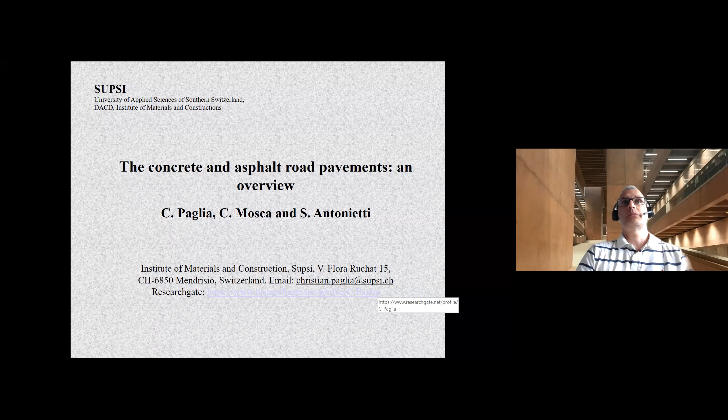Today I would like to talk a little bit about two main systems of construction of road pavements, giving you an overview of some issues, especially related to the durability of these two kinds of material used for transportation roadways. I will go through a brief introduction, talking about concrete roads and comparing them to asphalt roads, focus a little on the durability issue that arises in these two systems, and then go through the conclusions.

As you all know, there were times where most of the main building materials and also road materials consisted of stone. Here is an example of Naples, in Pompeii, where very big, large stones were used to build up the street. Today, the streets are actually still made of stone, smaller stone, aggregate stone, mixed with several binders.

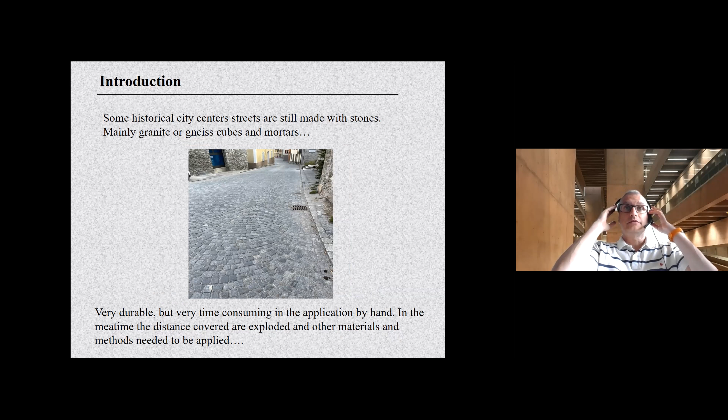Some mineral binder and more organic binder for asphalt road. Today, we also use a little bigger stone for some streets, especially in cities and small village centers, using cube stone linked together with mortar. Most of the stone used is locally sourced around the region of the Alps - mainly granitoids, gneiss, and quartzitic rocks, and in other places other types of rocks.

This type of street is actually very durable, but very time consuming, because sometimes every cube needs to be put by hand, so the application takes a lot of time. In the meantime, distances have exploded, so other materials and techniques are used to cover the roadways.

If you look at the literature research, you can see that generally it's stated that concrete road exhibits superior durability, around 25 years and sometimes longer, as compared to asphalt road, thought to last at least 15-20 years before a first restoration, at least of the first surface layer, is done.

These differences actually depend on material properties, but also on the service conditions of the roadways - the load conditions, the frequency of the load, the material used, and also environmental issues and the atmospheric exposure to which the roads are exposed.

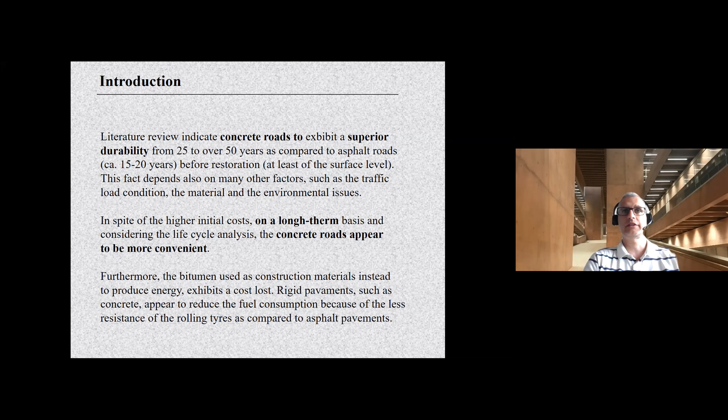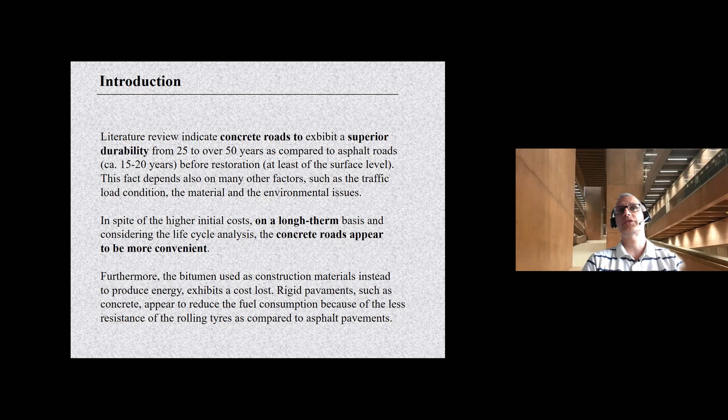In general, we can say that rigid pavements, such as concrete and cementitious material in general, appear to reduce fuel consumption because of less resistance of the tire when rolling, as compared to asphalt pavement. This is also due to rigidity, which makes a difference between these two types of material. The load distribution on a rigid pavement, like concrete, is more widespread on the surface, and locally the stresses are less intense compared to flexible asphalt road pavements.

In addition, there's the thermal impact - the asphalt material is black, and the thermal impact, heat, and light reflection may also be accounted for with this material.

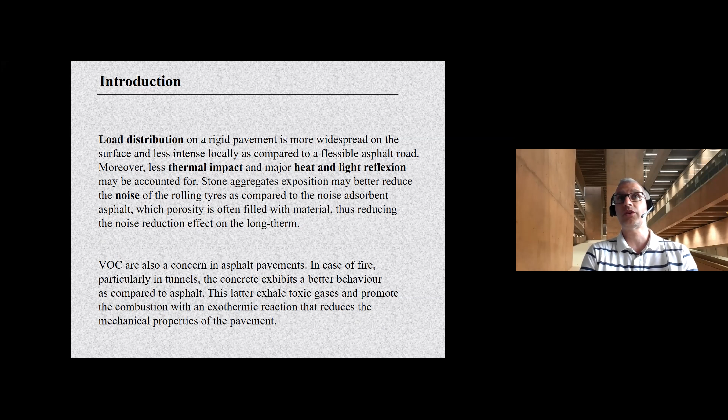Stone aggregate exposure may better reduce the noise of rolling tires compared to newer noise-absorbing asphalt, whose porosity, on a long-term basis, gets filled with material, closing these pores and reducing the effect of noise mitigation over time.

Volatile organic compounds are also a concern in asphalt, for instance in case of fire, particularly in tunnels, where sometimes a special mixture is used. When the fire ignites, these volatile compounds flow into the air, but this also happens during natural and conventional atmospheric exposure over time.

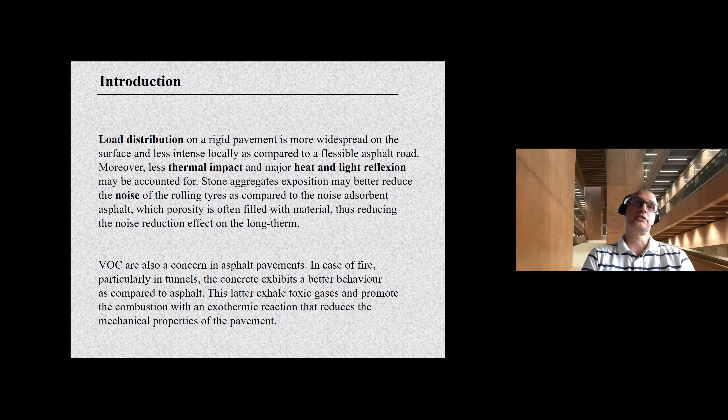In this fire resistance concern, concrete exhibits better behavior because it exhales less toxic gases and doesn't promote combustion with exothermic reaction that reduces the mechanical properties of asphalt pavements.

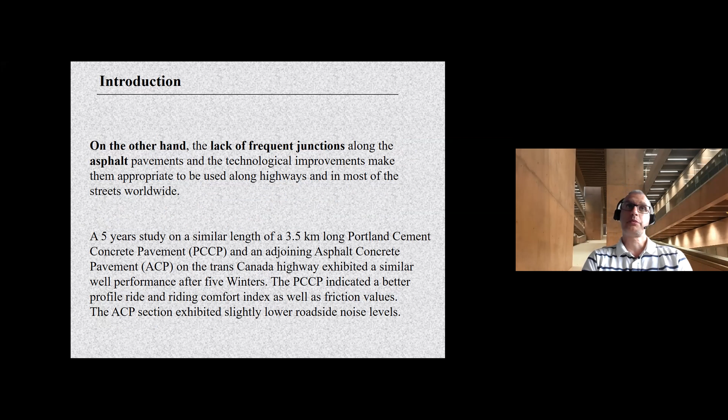On the other hand, asphalt pavements don't need junctions along the surface, and technological improvements made in recent decades have made them appropriate for use on highways, particularly where cars exhibit higher speeds, and in most streets worldwide.

We compared a study done on similar conditions - a 3.5 kilometer long Portland cement concrete pavement and asphalt concrete pavement on the Trans-Canada Highway, which exhibited good performance in both cases after 5 winters. The concrete indicated a slightly better profile ride and riding comfort index, as well as friction values, while the asphalt concrete pavement section exhibited a slightly lower noise level.

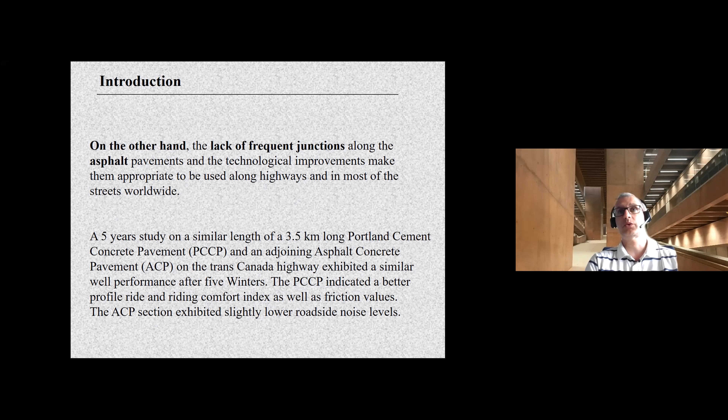Another advantage that can be seen in asphalt is that it can be placed quite quickly compared to concrete, and it also provides better safety of vehicles against snow and skidding compared to cementitious materials.

Portland cement concrete pavement, or concrete with supplementary cementitious material nowadays because of sustainability, has higher initial costs regardless of the cost index value, but Portland cement concrete pavements exhibit significantly lower maintenance and rehabilitation costs than hot mix asphalt along the roadways.

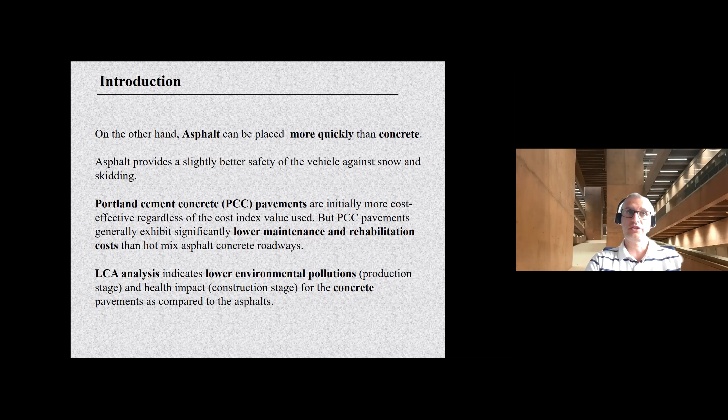Also, life cycle analysis indicates lower environmental pollution at the production stage and lower health impact at the construction stage for concrete pavement compared to bituminous materials.

We looked at some cases and saw substitution of concrete slabs on a street about 400 meters above sea level, where they used concrete with strength class C30, 30 megapascal, with a high exposition class resistant to carbonation, chloride diffusion, and freeze resistance—so generally high durability against corrosion types induced by CO2, chlorides, and freezing. We had a maximum aggregate diameter of 32 millimeters, controlled chloride content, and good workability index.

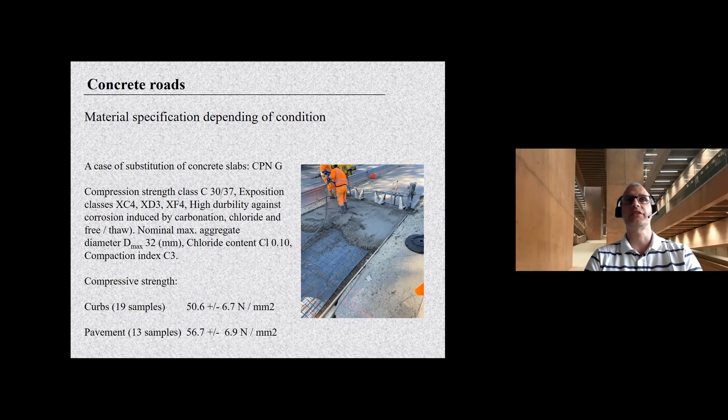We measured compressive strengths on the curbs and pavement, and you can see the mechanical properties are well above 50 megapascal, which is actually very high resistance for this type of concrete.

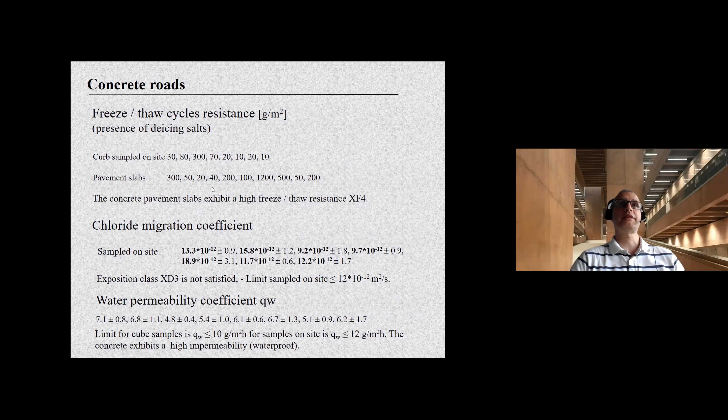Also, regarding resistance to freeze and thaw, respecting exposition class XF4, the pavement slabs and curbs sampled on site exhibited quite good resistance to freeze-thaw attack.

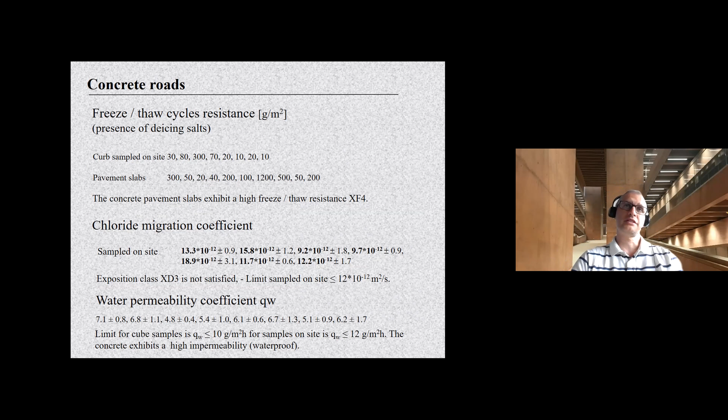Concerning the chloride migration coefficient, some values were above 12 times 10 to the minus 12 square meters per second—values ranging between 13 and 15, with some reaching 18. The exposition class XD3, which is the maximum class for cementitious material resisting chloride penetration, is not always respected.

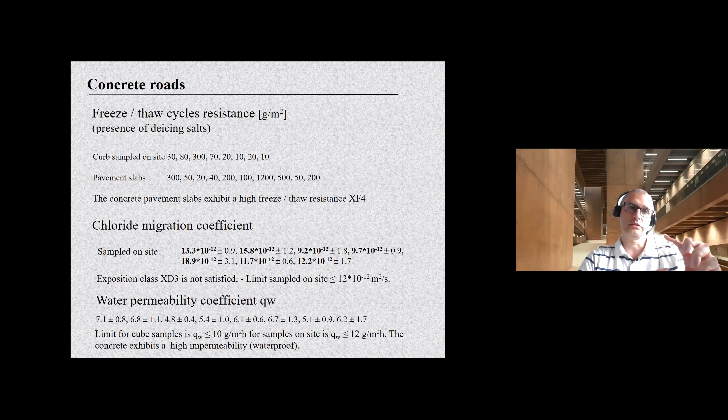Although this is sometimes not a problem if the steel rebars or steel nets are embedded deep enough in the concrete, and the concrete cover over the steel is thick enough—at least 5 centimeters—and the concrete is high quality.

If we look at the water permeability coefficient, the measurements we carried out show values pretty much below 10 to 12 grams per square meter per hour, indicating that the concrete exhibits high waterproofing quality.

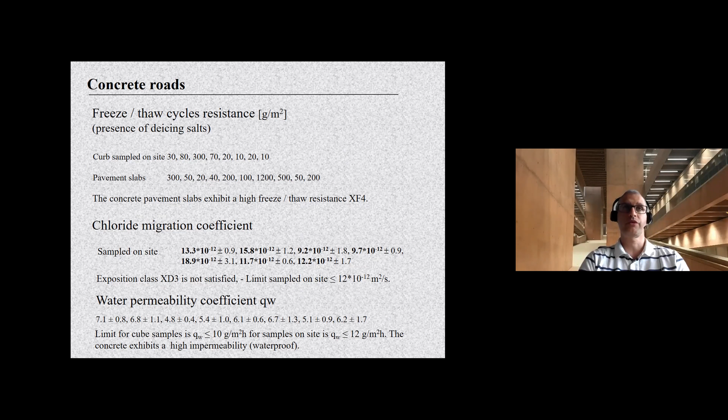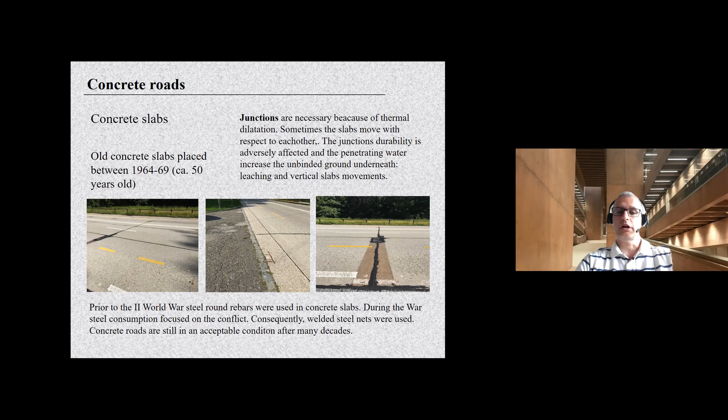Sometimes the junctions are adversely affected by the atmosphere and water, causing cracks that need to be repaired with bituminous material, as seen in the right picture. Water also infiltrates downward into the unbound material, causing leaching of fine material, which leads to vertical movement of the underlying pavement base. The concrete slabs then move vertically relative to each other, causing movement or noise when cars pass over the junction—a problem that needs to be taken into account.

From the concrete road you can also sometimes see water leaching out stone aggregate, as in the upper left picture. The exposed aggregate increases roughness over time due to better tire adhesion being maintained. In the lower left picture, tire mark residues indicate that roughness is partially maintained.

In the upper right picture, you can see surface treatment or finishing of the concrete slabs—this is a ramp or slope going down to a parking garage, showing riffling and striation of the surface to maintain necessary roughness. This surface preparation method is sometimes also used for heavily trafficked streets. In the lower right picture, you can see the texture of the street border, where the aggregate is exposed and more visible.

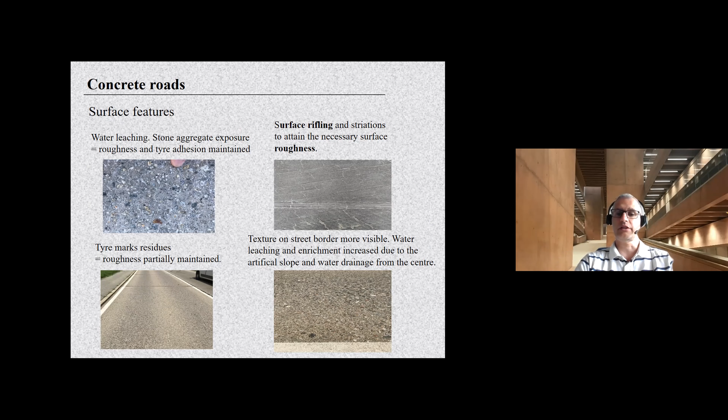This is actually due to water leaching and enrichment that is increased by the artificial slope of the street, which causes water to flow to the side toward the drainage. During this flowing action, the fine graded cementitious material that holds the stone aggregate together is sometimes leached away, and the aggregate becomes exposed on the side of the slab.

There are also some other problems in concrete roads: aging due to load, shrinkage of the material, and sometimes fatigue. You can see some of these issues appear as longitudinal cracks along some concrete slabs. The curve also causes high surface shear stresses, which put the slab in tension and cause crack formation, as you can see in the left and middle pictures, where longitudinal cracks run from joint to joint on the slabs.

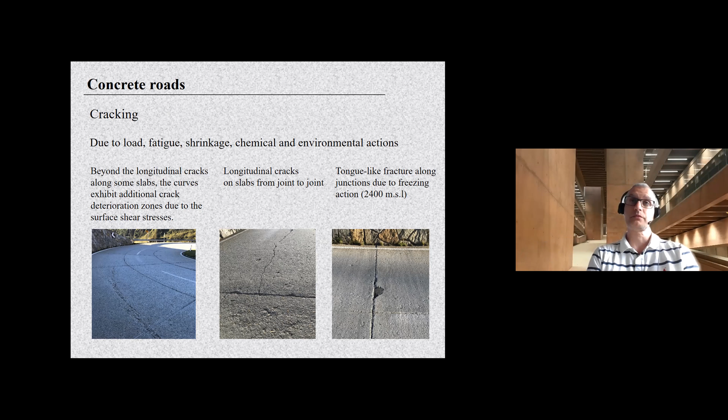Along the junction in the right picture, you can sometimes see a tongue-like fracture caused by the freezing action. This was a street covered with concrete slabs, located more than 2,000 meters above sea level.

Sometimes during restoration work, asphalt is put on old concrete slabs as an overlay. In this case, it's important to avoid what's called reflection cracking of the asphalt cover top. So they sometimes introduce an asphalt joint or apply sufficient asphalt overlay with a minimum thickness of 200 millimeters to avoid this reflection cracking coming up from the junction of the concrete slabs.

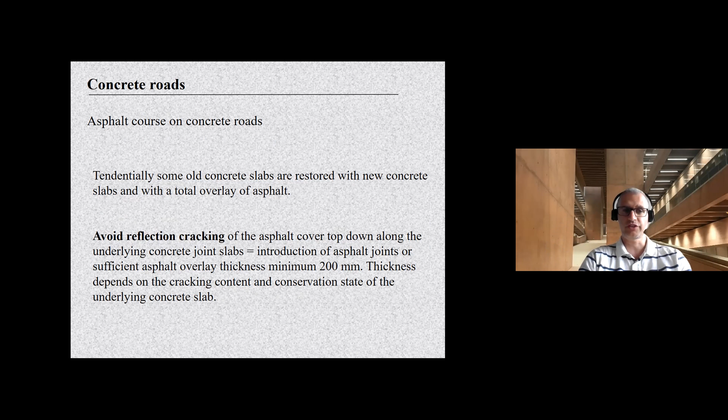The minimum thickness to apply also depends on the cracking content and the conservation state of the underlying concrete slabs.

We also have these systems of asphalt roads composed of 3 or 4 layers of different asphalt types, depending on the load and frequency of traffic passing through the pavement. There are many possible asphalt types, with a large nomenclature depending on binder type, hardness, softness, polymer addition, and aggregate size.

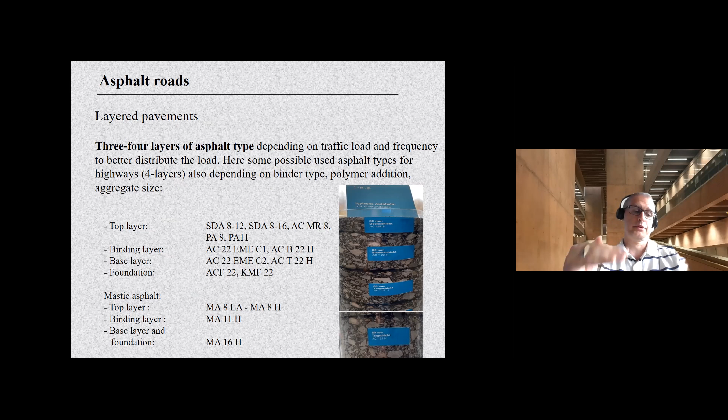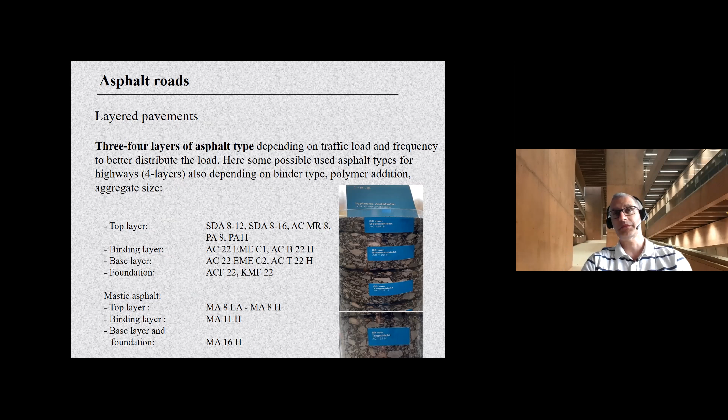Basically there is a foundation layer at the lowest level, a base layer, a binding layer, and a top layer going through the whole system. Generally, conventional roadways are composed of 3 layers, while highways are sometimes composed of 4 layers of asphalt material. Here is a highway, pretty heavily trafficked.

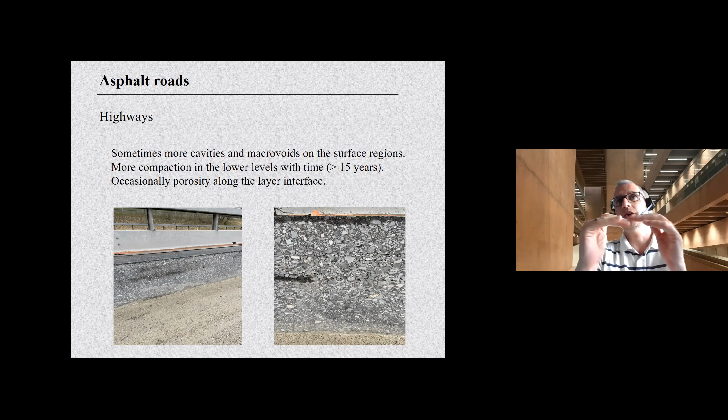You can see some cavities and macro voids in the surface region of this 15-year-old highway structure. Underneath, in the layer below, you can see more compaction due to the load and compression of the material. Along the interface of some layers, we can also find some porosities and pores.

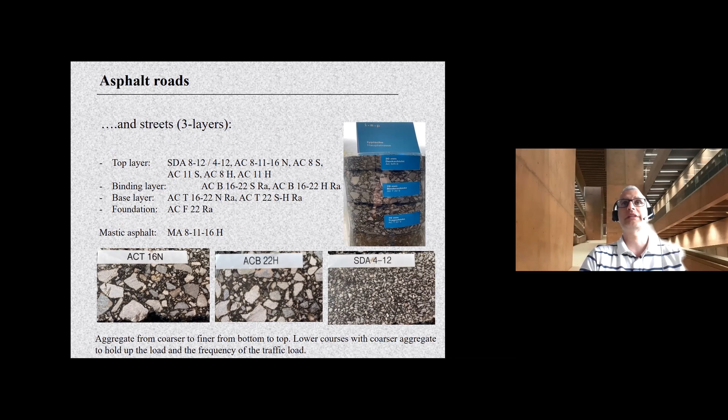As I said, in conventional streets they usually apply only 3 layers: a top layer with mastic asphalt, and then a binder layer or foundation, a binder and a base layer. Generally, the aggregate size changes from coarser at the bottom to finer at the top of the asphalt system, because the bigger coarse aggregate provides support for the surface material against traffic load.

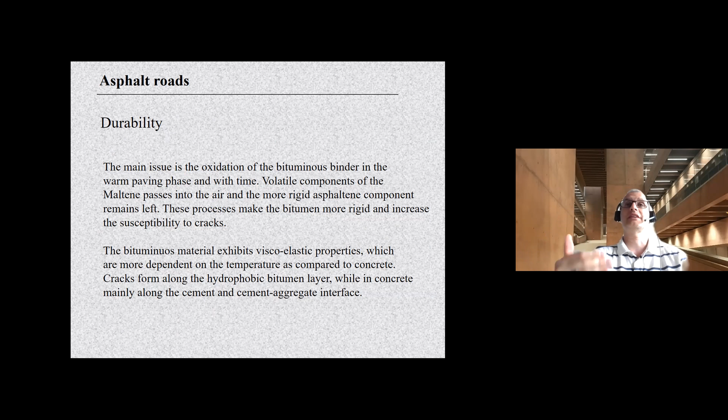Looking at the durability issue of asphalt, the main issue is actually the oxidation of the bituminous binder during the warm paving phase or over time. Sometimes the volatile component of the organic binder, the maltenes, evaporate into the air, and the more rigid asphaltenes remain. This process makes the bitumen more rigid over time, increasing its susceptibility to cracking.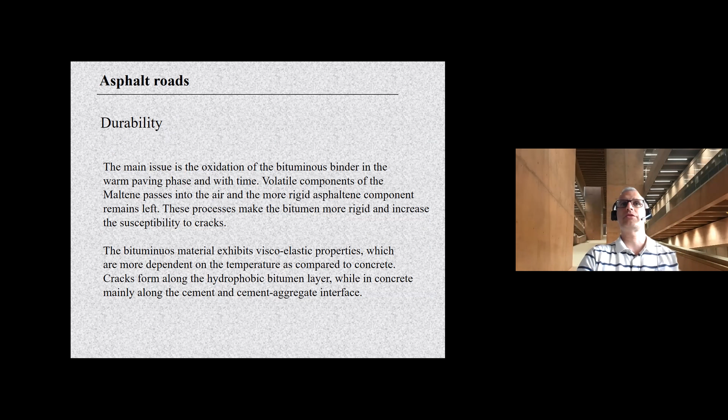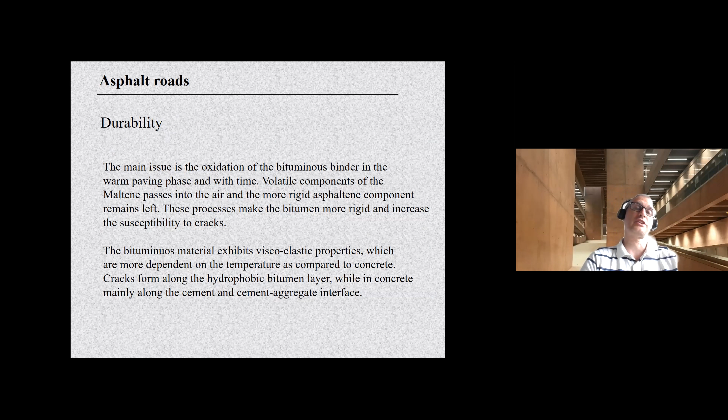The bituminous binder systems exhibit viscoelastic properties and are more dependent on temperature compared to concrete. Sometimes cracks form along the hydrophobic bitumen layer, while in concrete, the main crack formation is located in the weakness part of the material, which is the cement paste or the cement-aggregate interface.

Just to give you an idea of the binder content in asphalt, the organic binder content ranges between 2 and 6% by weight. In concrete, it reaches up to 15% by weight.

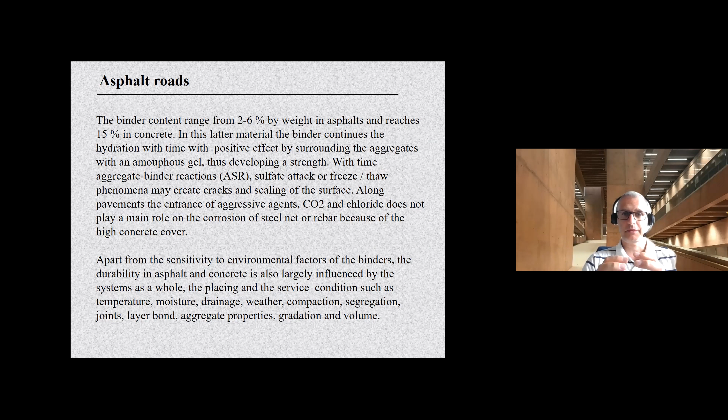In cementitious material, the cement paste forms a gel that surrounds the stone aggregate and compacts them together over time. Durability is mainly affected by reactions that can occur along the interface between the cement and stone aggregate, for instance alkali-silica reaction, sulfate attack, or freeze-thaw attack, which may create cracks and then scaling of the concrete surface. Meanwhile, CO2 and chloride sometimes don't play a big role if the concrete cover over the steel rebars is high enough.

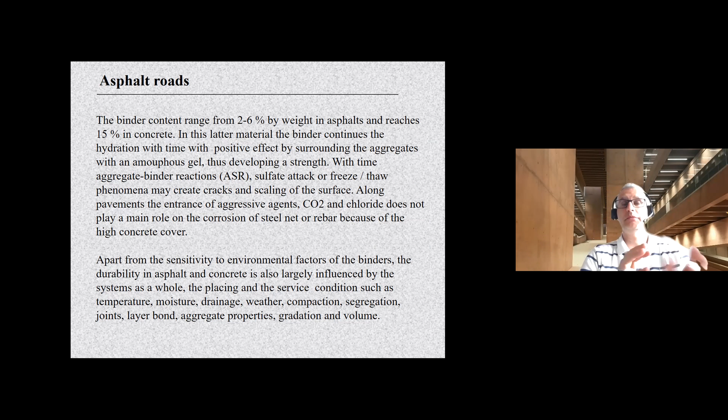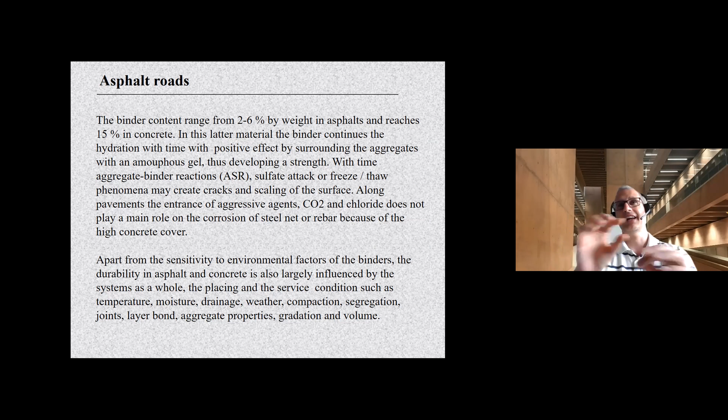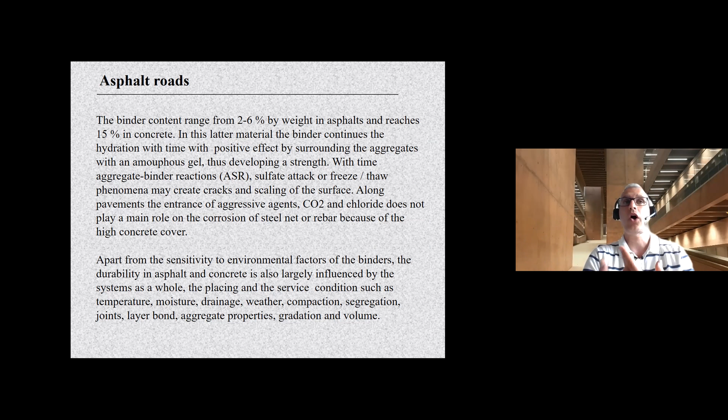It's also important to notice that both concrete and asphalt need to be considered as systems, with the different pavement layers on the asphalt and with the concrete material or slab and the foundation, so that some of the working issues such as placing or the service condition, temperature, weather, compaction, segregation, type of joints, aggregate and gradation and volume all play a significant role in the durability of this type of pavement.

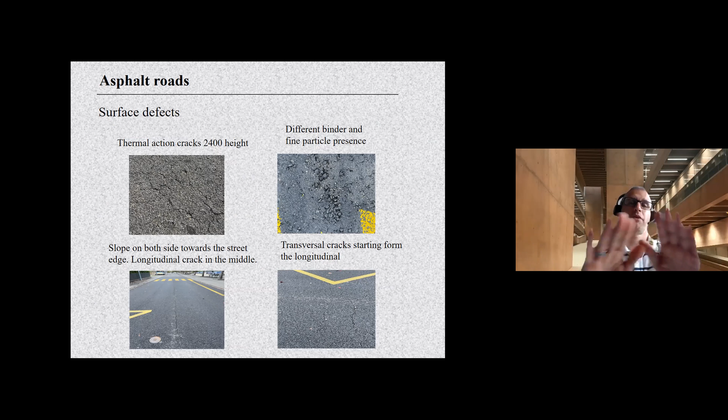Here are some examples of asphalt road defects. We can see the thermal action crack at 2,400 meters above sea level on the top left picture. Down left, you can see some slope on both sides of the street. In the middle, you can see a crack going all the way through the longitudinal of the street, and perpendicular to this longitudinal crack, some transverse cracks may form, as seen in the picture on the right below. While on the right up, you can see the different fine binder presence and fine particle presence on the asphalt surface.

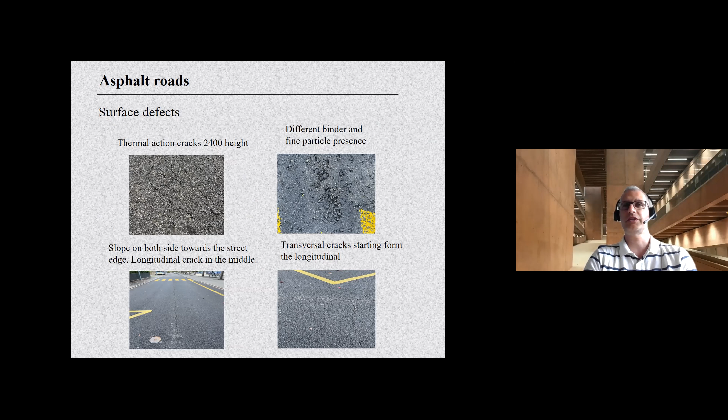So sometimes they use to construct these roundabouts with concrete slabs that are jointed, because of the high rigidity of the material.

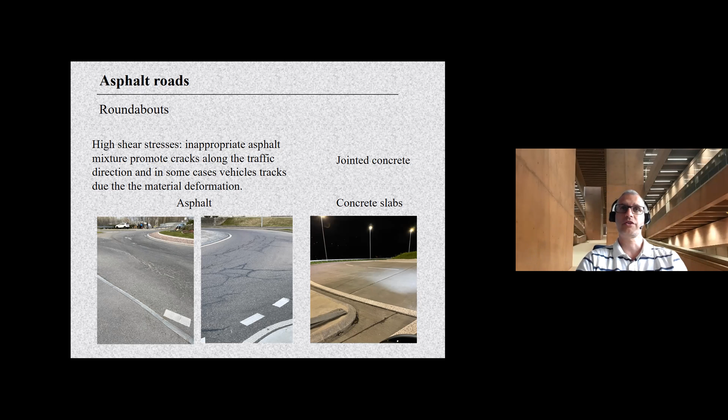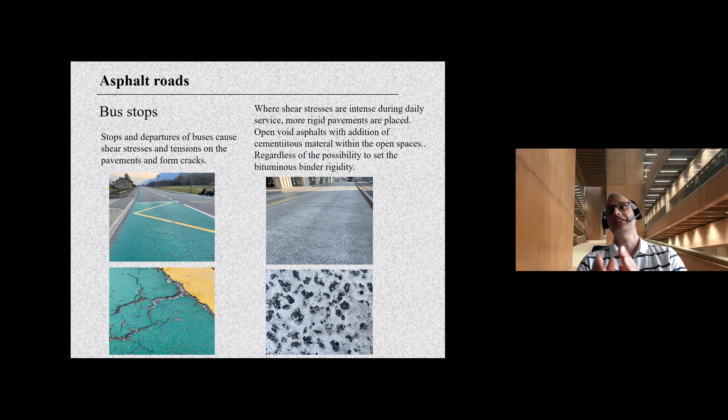A similar thought is also made for bus stops, because the stopping of the bus causes again shear stresses and tension on the road pavement, and these tend to form cracks, as you can see on both left pictures. On the right picture, you can see that in this case, a concrete material or slab with junctions was not used.

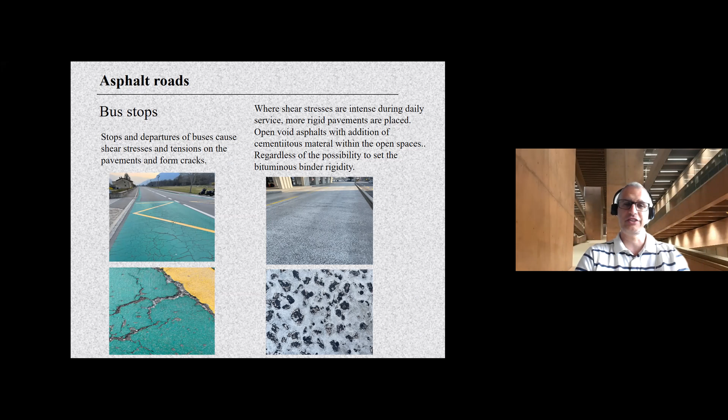This is also a bus stop, but they used an asphalt material with open voids on the surface, and then in the open voids, they added a cementitious material mixture that filled up the open space and made the material more rigid, although there is also a possibility to use bituminous material that is more rigid. In this case, they tried a mixture between cementitious material and asphalt material in order to diminish the effect of shear stresses.

The unbound ground material, as I said, the materials must be considered as a construction system, and also the unbound ground material, so the compaction of the materials, plays also a significant role in getting a durable asphalt pavement.

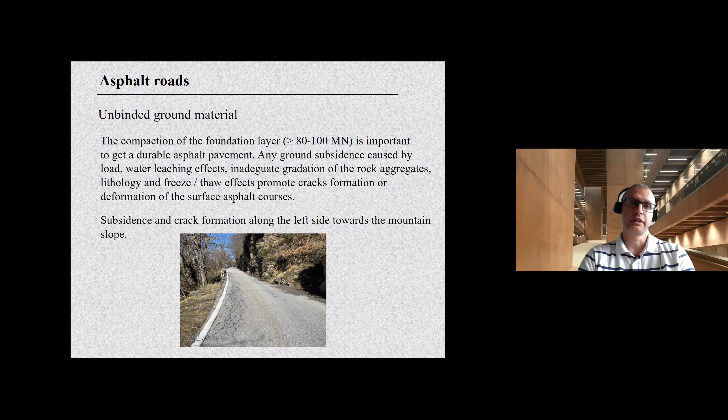Ground subsidence - this is actually a clear case of a mountain street that goes up. You can see that there are many factors affecting this formation of cracking along the left side of the street. So freeze-thaw attacks, leaching, unbound material on the left side of the street. On the slope, this is leached away, and the street tends to crack because of this support that is no longer present from the unbound material.

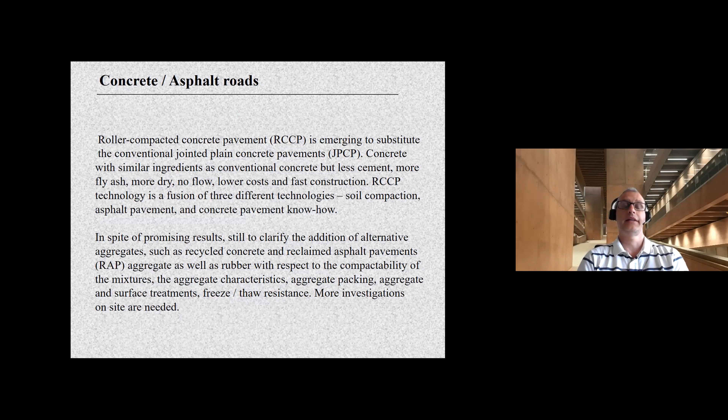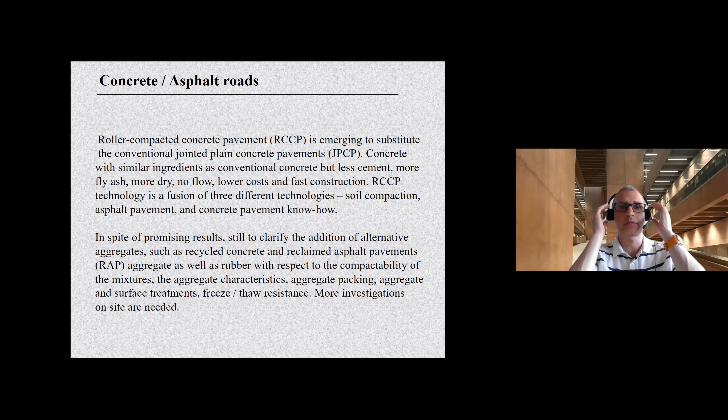There is also an emerging technique called roller compacted concrete, where the concrete is compacted with a roller, and the material is similar to conventional concrete, although with a lower content of cement, a more dry mixture, and the material doesn't flow - it is compacted with a roller. This technology needs to be implemented in order to construct, I would say, conventional roadways. At the moment, it's just used for secondary level roadways.

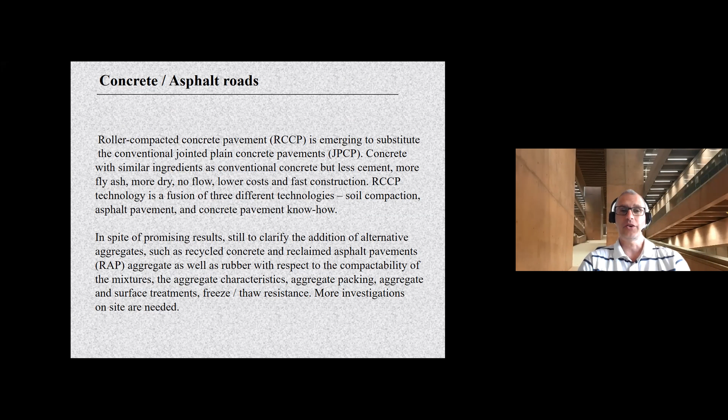There is also a topic to investigate: the addition of alternative aggregates, recycled aggregate or reclaimed asphalt pavement, rubber addition, plastic addition in asphalt pavement, with respect to the compactability of the mixture, packing, surface treatment. All these investigations are currently done in concrete and asphalt pavement technology.

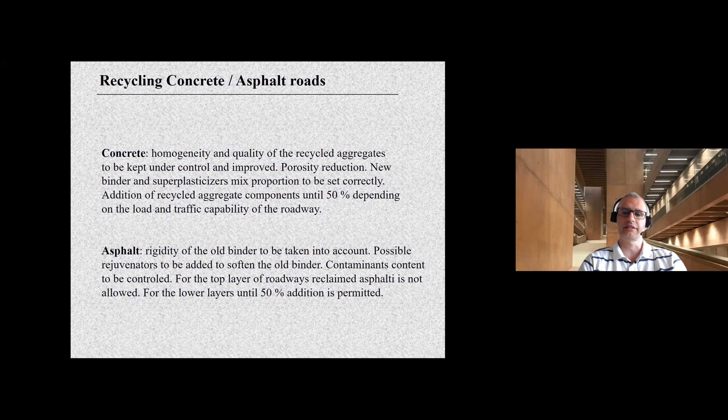And also for the asphalt, the rigidity of the old binder must be taken into account, and sometimes rejuvenator materials are added to the old binder in order to use the recycled asphalt pavement. Although for the top road levels, in some countries it's still forbidden to use reclaimed material because of quality concerns - they do not achieve some of the rules imposed by the normative.

So to conclude, I will say that concrete and asphalt exhibit similar basic material features of a system which consists of binder and rock aggregates.

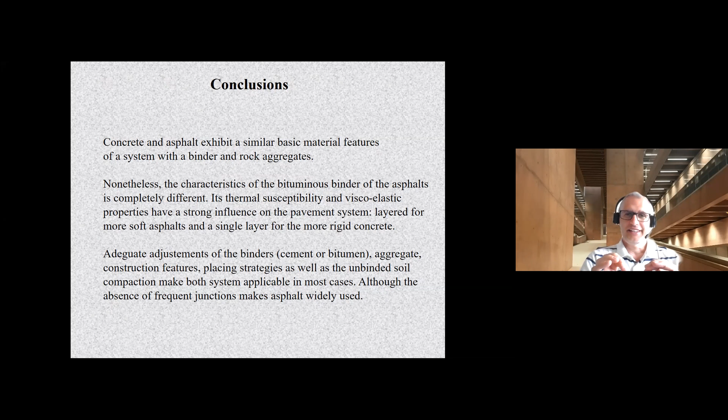The characteristic of the bituminous binder of the asphalt is completely different. So the thermal susceptibility, the viscosity and elastic behavior are also different.

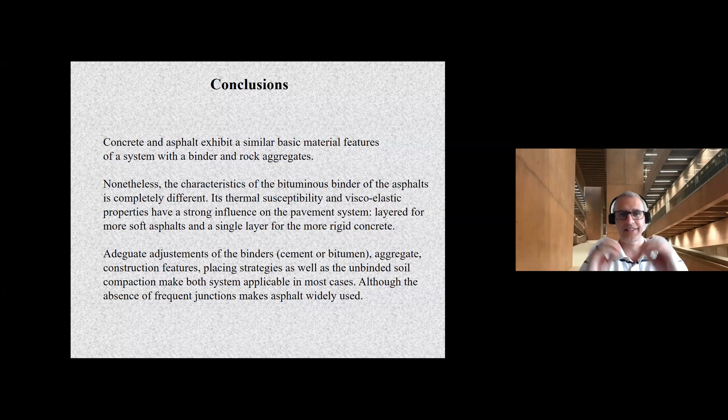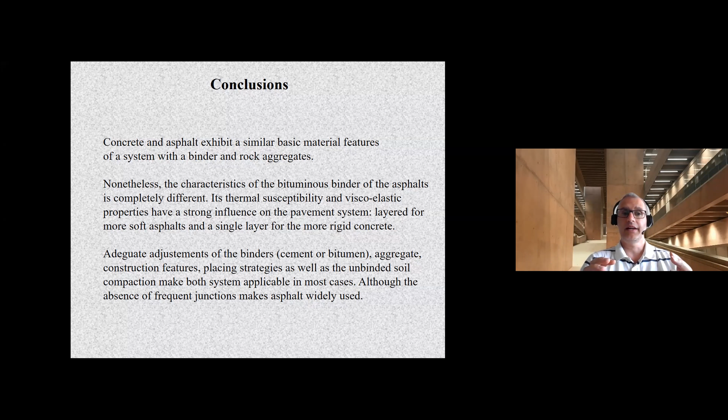The asphalt are layered systems. The concrete is, I will say, double layered, so concrete and the unbound layer underneath. So there is a need for adequate adjustment of the binder for cement and bitumen to make this material aggregate applicable. The compaction makes actually both systems applicable, although the absence of frequent junctions makes the asphalt more widely used as compared to concrete.

On the other hand, the durability of this bituminous pavement appears to be a little lower as compared to concrete pavement, because of the high shear stress resistance that is not withstood by this asphalt material.

Both materials are able to incorporate recycled material, almost up to 50% for the concrete. Within the asphalt, this needs to be a little more investigated, and some investigations are also going on in the mixed alternative of the two materials, and technological improvements to increase rigidity and durability of the pavement, in order to get pavement without junctions that can last a little longer.

Thanks for your attention.

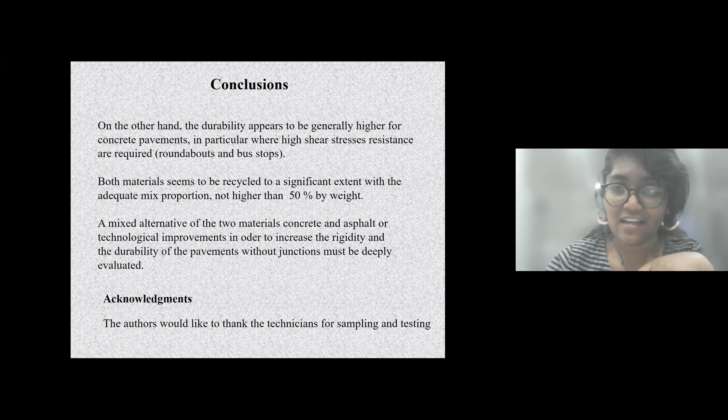Christian, I want to ask you, as far as I know, sometimes there were a few works in literature where addition of nanomaterials or different other fillers, like to polymer, also to concrete, can improve their strength, durability, and whatever. Are you familiar with such techniques, and do you know if people try to use this in your field?

Yeah, also you must consider that in both materials, actually, concrete and asphalt, there is many polymeric addition that are ongoing. From one side, from the asphalt material, for instance, there's an effort to reuse the recycled asphalt pavement, especially for the surface layer. So they're working a lot with these rejuvenator types, which are actually not very easy, but they're trying to implement research in this concern.

And also for the durability issue, the oxidation and the rigidity. And for the concrete, there are also many additions, actually, more in that direction, because the concrete is quite durable already. So they do some additions mainly because of the sustainability of the material, and they use a lot of supplementary cementitious material like fly ash, silica fume.

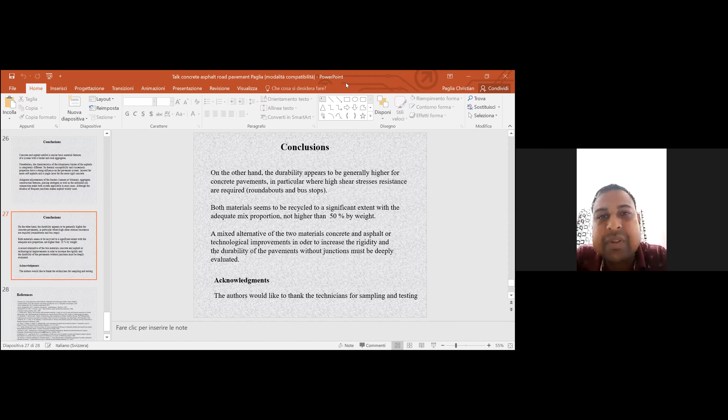And also not only the aspect ratio, but also the packing of the granulometric distribution of the stone aggregate. They're trying to optimize the packing and the volumetric content on the different grain sizes, sometimes to reduce the cement addition in concrete material because of sustainability. If you add less cement and get similar results, you are more sustainable, because cement production releases CO2, for instance.

And also for the asphalt, although the bituminous binder dosage is also pretty much low as compared, for instance, to cementitious material in concrete.